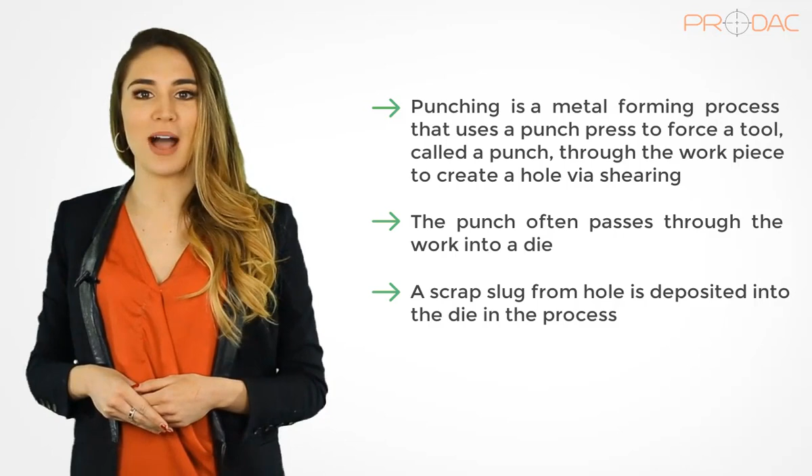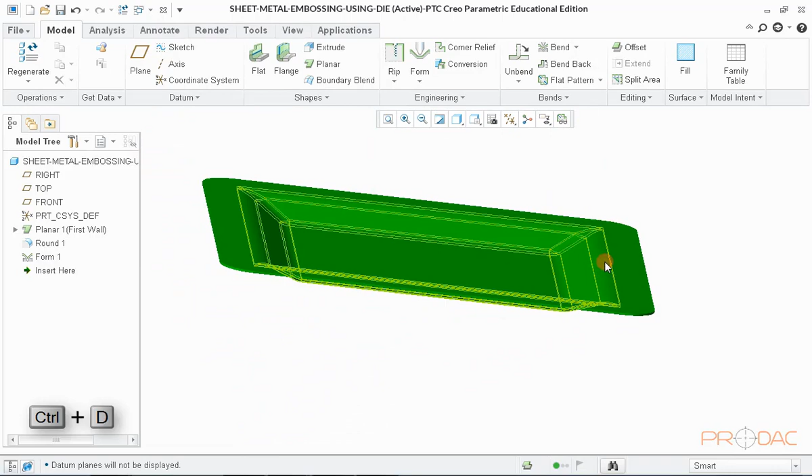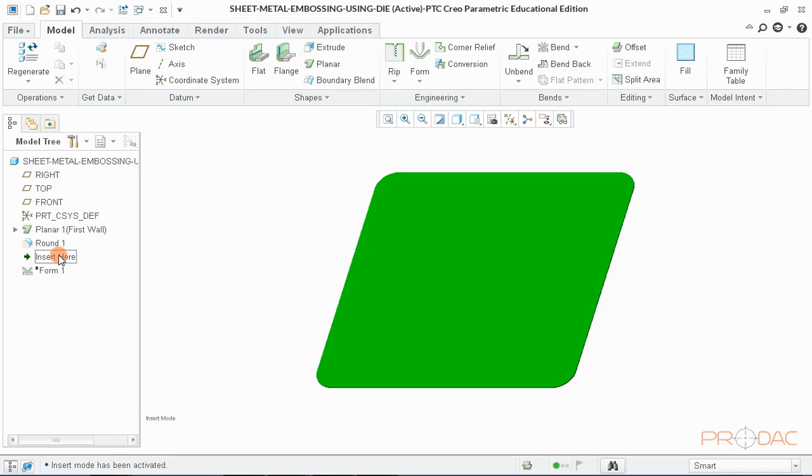Press Ctrl+D to fit the model in the screen. Change the orientation of the model to front view. It enables us to see the formed feature from the front side. Now pull the green arrow in the model tree above the Form 1 feature. So, now we get a flat sheet where we need to create this form feature using die.

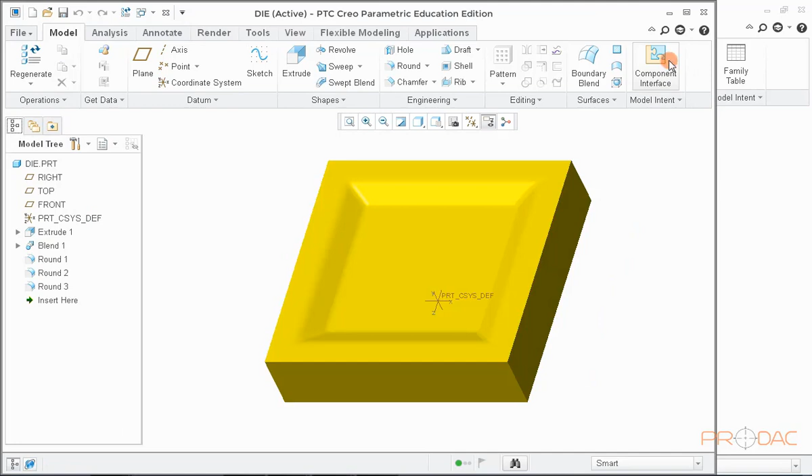Now, select the Form 1 feature in the model tree and right-click on it. After that, select the Open Base Model from the pop-up menu. Another model opens up. This is the base model used to create the final product. This is called die, and it has the similar embossed feature in it. During the product creation, this feature gets embossed into workpiece.

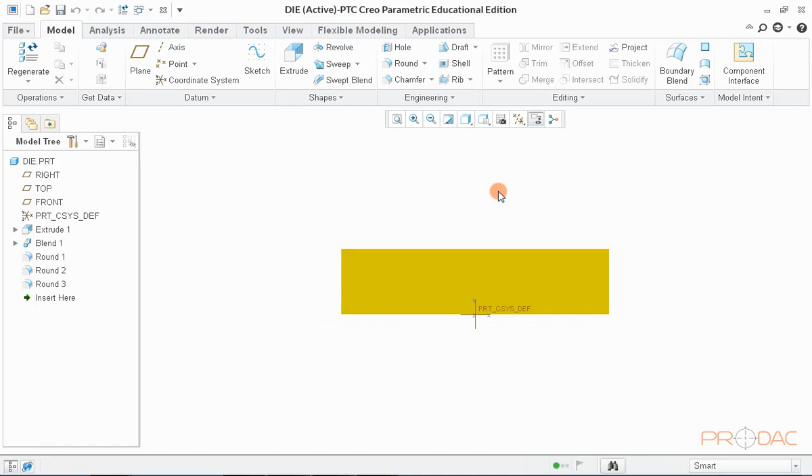Now, if we look at the front view of this part with hidden line visible, we can see the embossed profile very clearly. This is the exactly same profile which has to be embossed in our workpiece. Now, close this and switch back to working model.

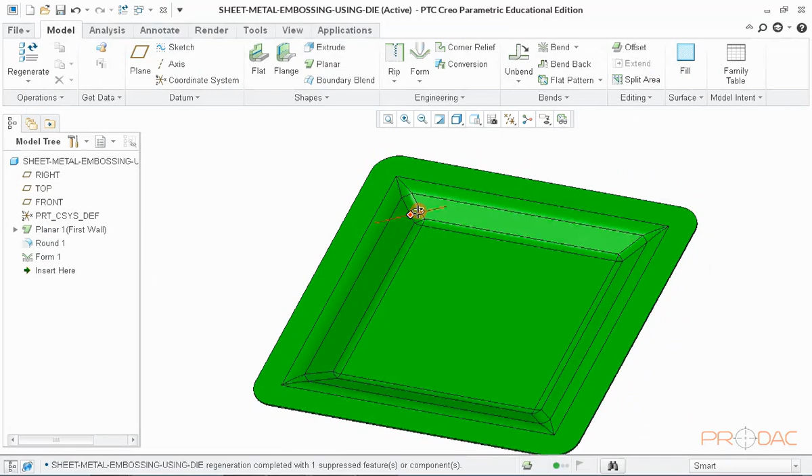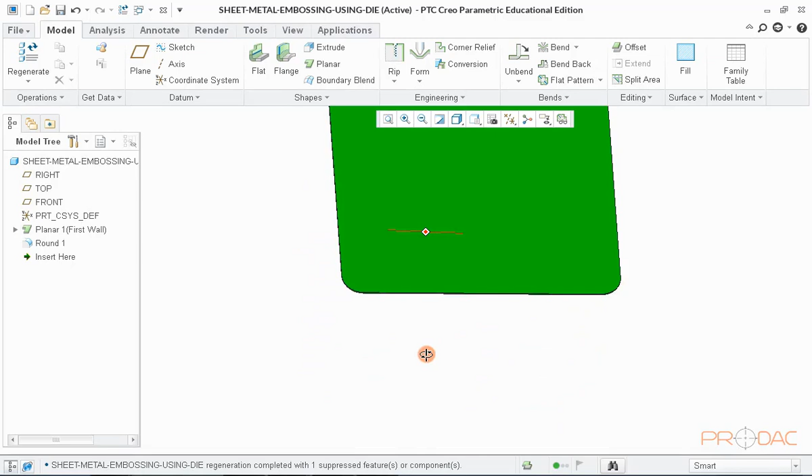Now, select the Form 1 feature in the model tree and then right-click on it. Choose the option Delete from the pop-up menu to delete this feature. Now we have a flat sheet which we used to create the final model. Next, click on the button labeled as Form in the top menu bar and use the option Die Form from drop-down menu.

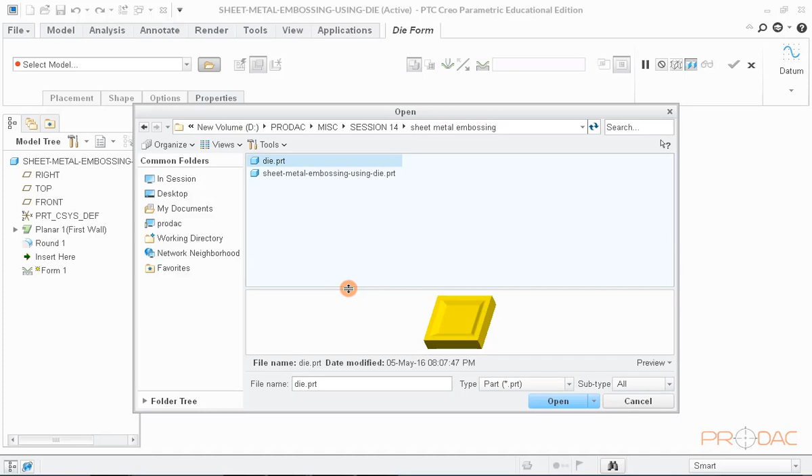Now open the desired die using the File Open button. A pop-up window opens up where we can see preview of the punch or die before we open it up. Once we open up the die, we have flat sheet and die available in the same window. Now, switch on the datum planes.

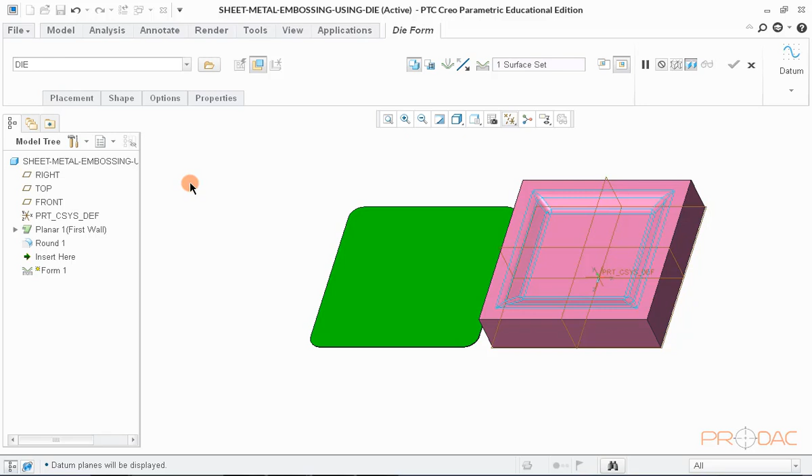Even after switching on the planes, we do not see any planes visible in the green part, which means that the layer containing planes is hidden. So, we have to unhide that layer. To do this, open up the layer tree and unhide the layer from there. Now, we have the planes visible in both the parts.

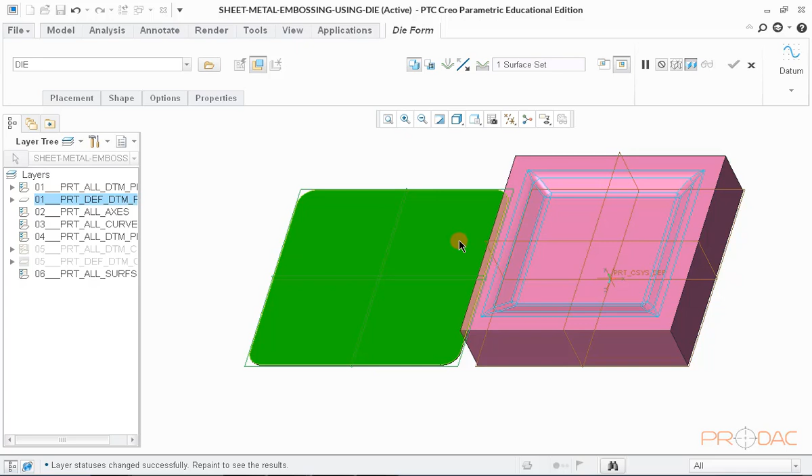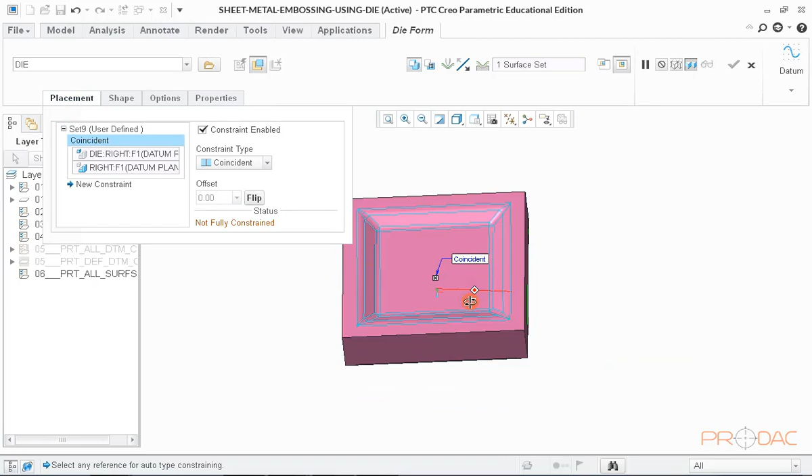Next, we have to assemble die and sheet metal part together in such a manner that embossed feature in die coincides with the desired position of emboss in flat sheet. First assembly constraint would be plane to plane mating. Second constraint would be surface to surface mating. And third constraint would again be plane to plane mating.

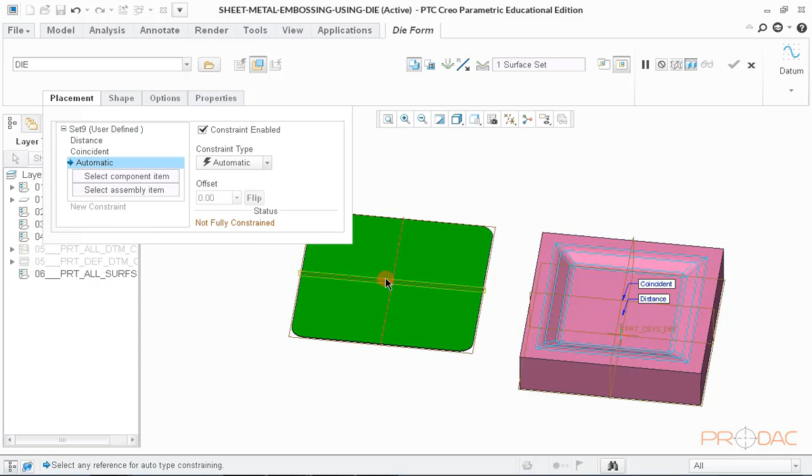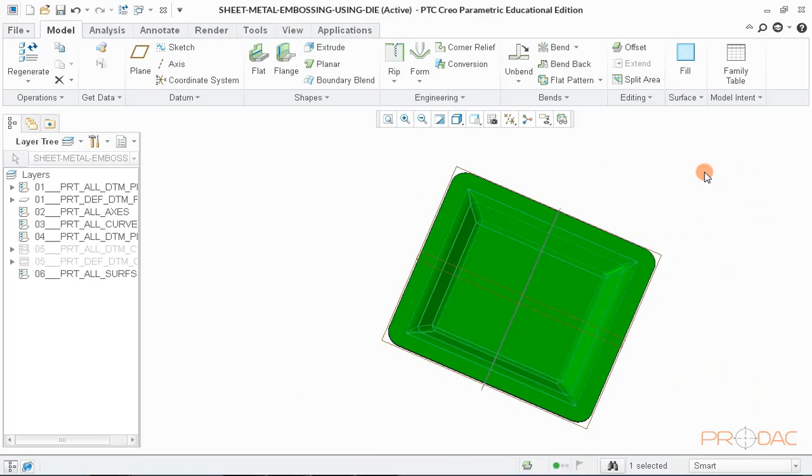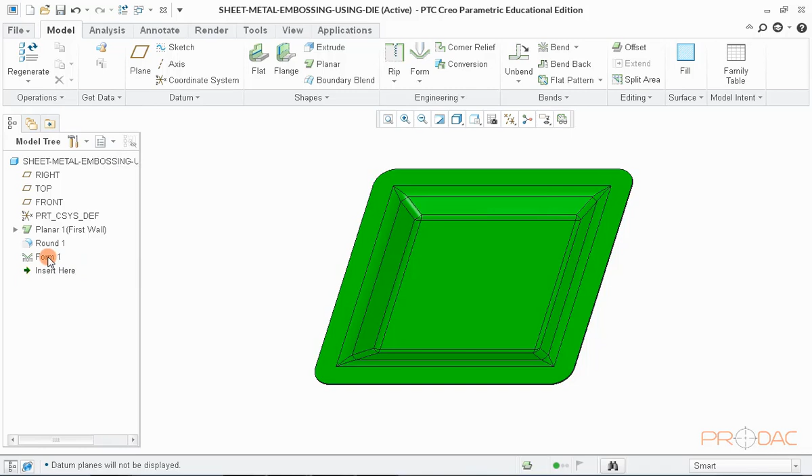Once done, click on Preview button to see the result. Result looks satisfactory. So now we can click on OK button to finish it. Hide the planes for better visibility. Press Ctrl+D to fit the model into window. With this, we have finished the learning of embossing operation using die. Next, we'll learn embossing operation using punch option.

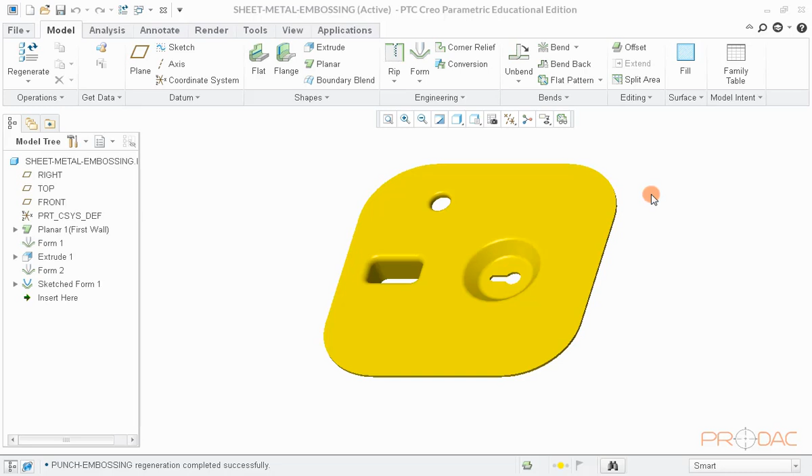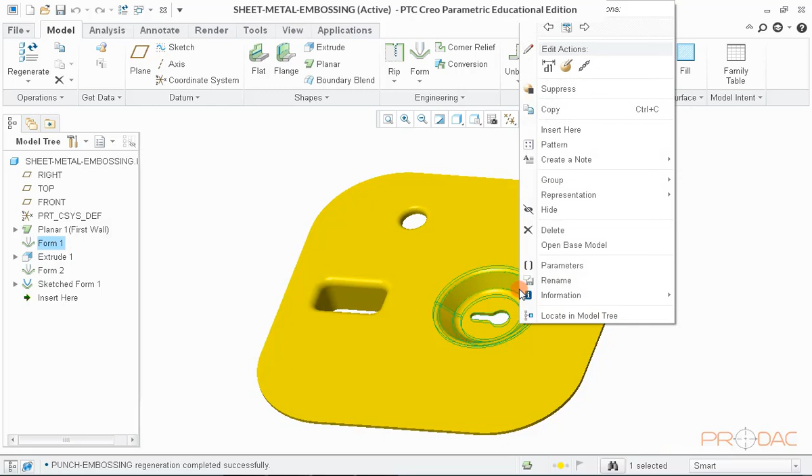This is the sheet metal model we'll be creating using punch operation. These are the punched features. As you can observe, radius is also created at the edges. To see the base model or punch for this feature, select the feature and right-click. Now choose the option Open Base Model from the menu. The punch model opens up.

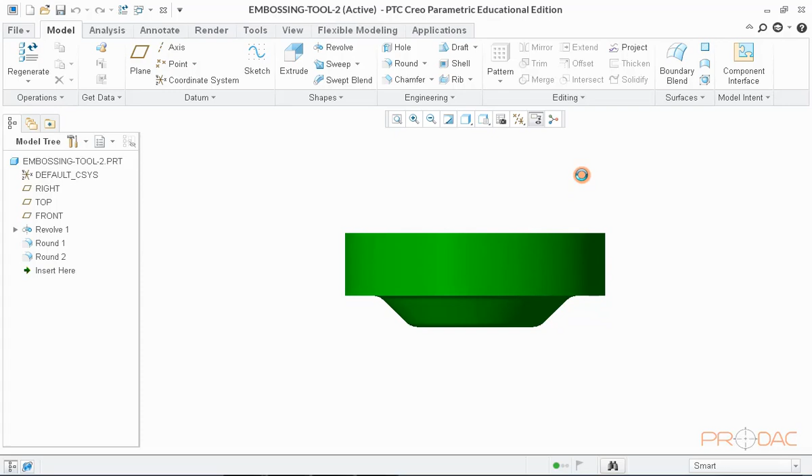Punch has all the features which need to be created in sheet metal. Press Ctrl+D to fit the model into the screen. Change the orientation of the punch to the front view. Now close the window and switch back to modeling window. Now open the base model of this feature.

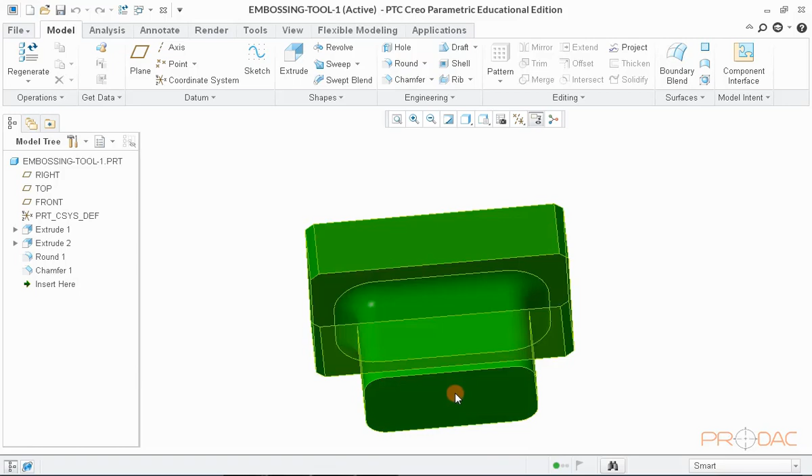Since this punch will create a cut hole in the sheet metal, the edges of the punch do not have radius. They have sharp corners to facilitate cutting. This is the bend edge, so we need radius here. Sharp edges are not allowed at bending locations. So, this is the geometry of the punch based on which the feature would be created in the sheet metal.

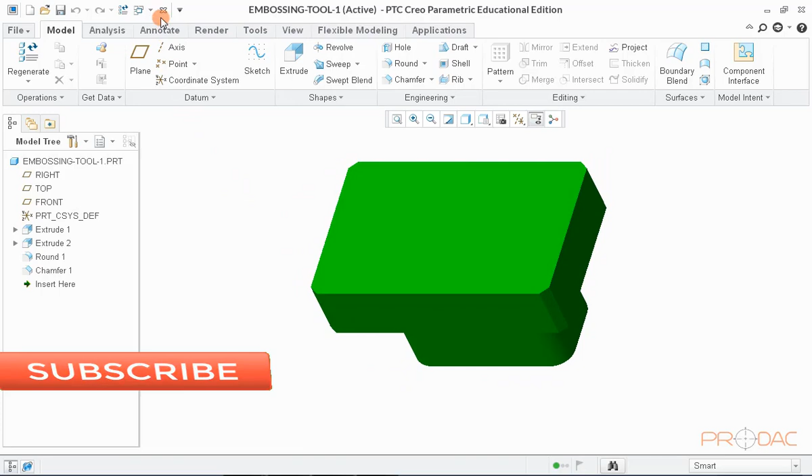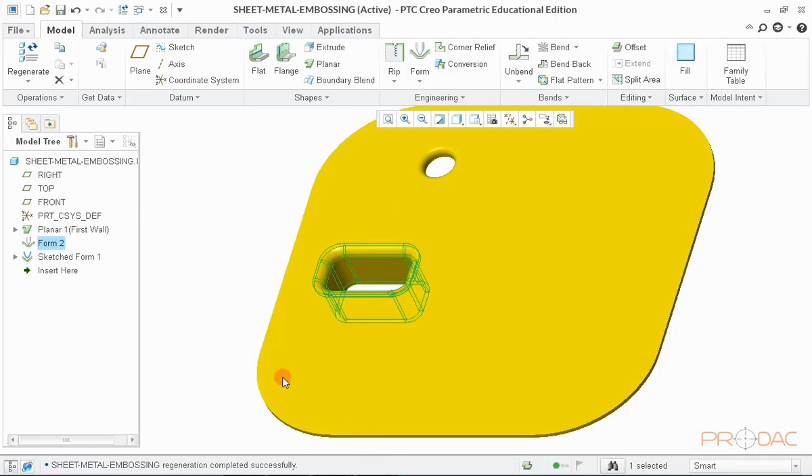Now, close this window and switch back to the modeling window. Now delete all the formed features one by one. This can be done by selecting the features and then right-clicking and choosing the option Delete from the pop-up menu. Now we have a flat sheet where all the features will be created.

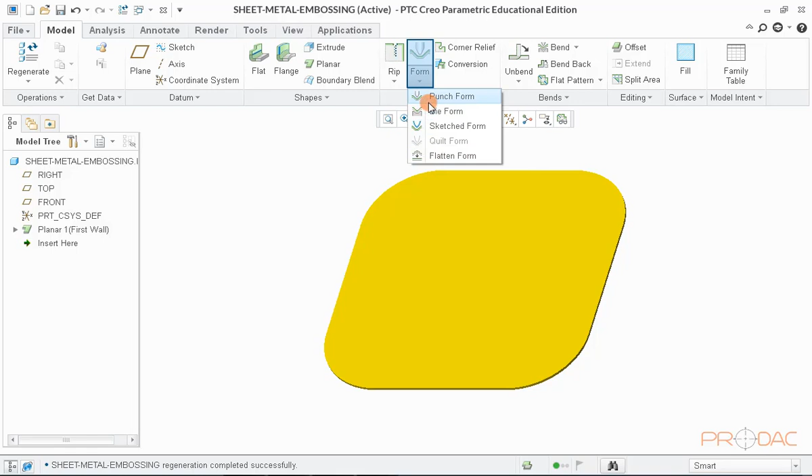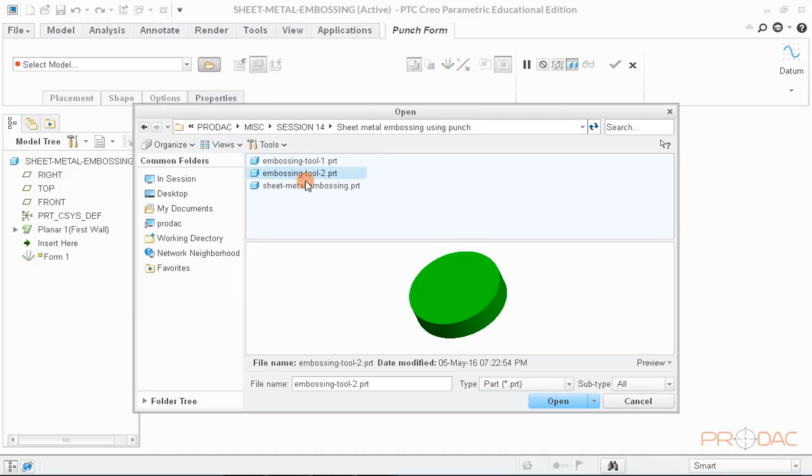Now, click the button labeled as Form in the top menu bar. Now choose the option Punch Form from the drop-down menu. Now we have to browse to the punch model. So, click on the file browsing icon next to the model selection field. A pop-up window opens up. Select the required punch file to open, and then click on the Open button at the bottom of the pop-up window. Now, we have both the punch and flat sheet in the same window.

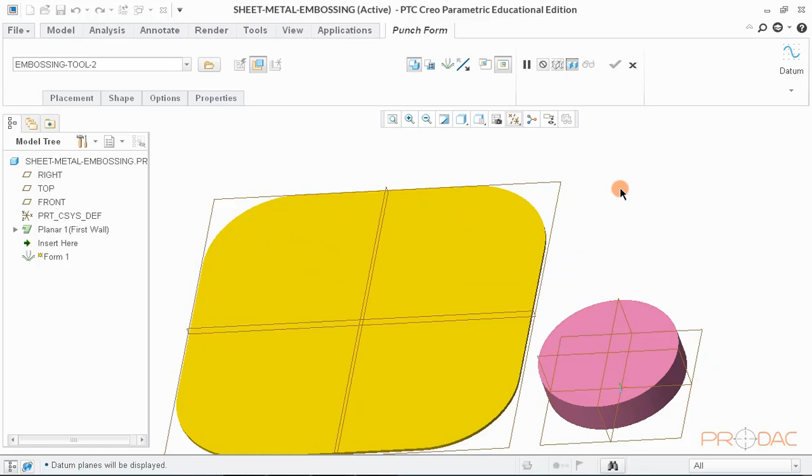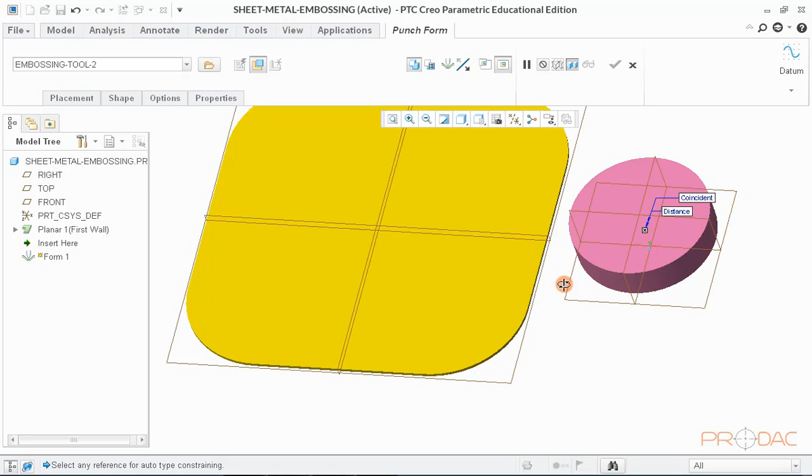To create a punched feature in the plain sheet, the punch has to be placed on top of the sheet metal at the desired position of feature creation. So, let's constrain both the parts by assigning mating conditions. Mating constraints must be given based on the position of the embossed feature. Constraints can be plane mating, plane offset, and surface mating. This mate is tool plane to surface offset. Next is surface to surface mating.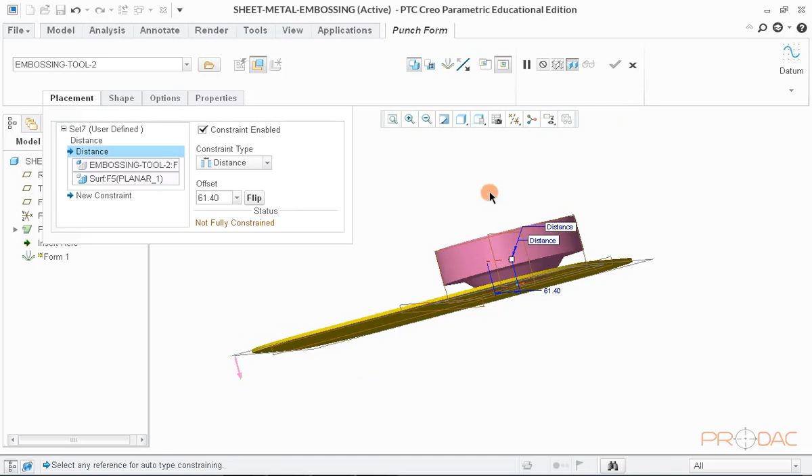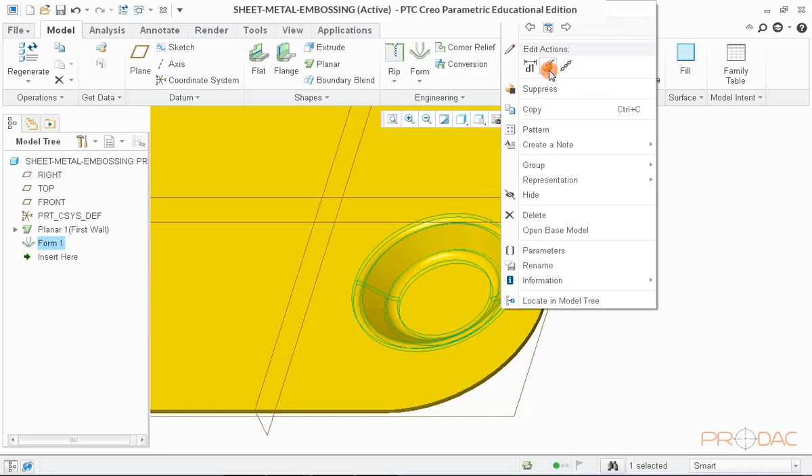Once the punch is fully constrained, click on the preview button to see the shape of the embossed feature. Now, click on the OK button to finish it. Press Ctrl plus D to fit the model into the screen. To fine-tune the position of the embossed feature, go to Edit mode by the right-click menu and edit the position of the punch.

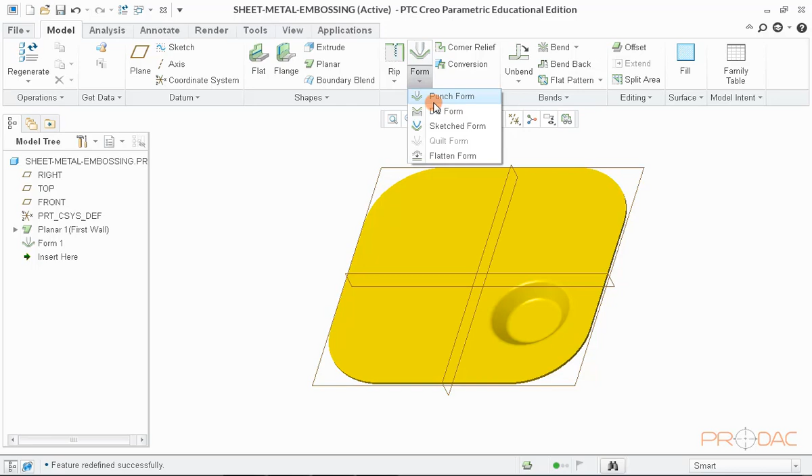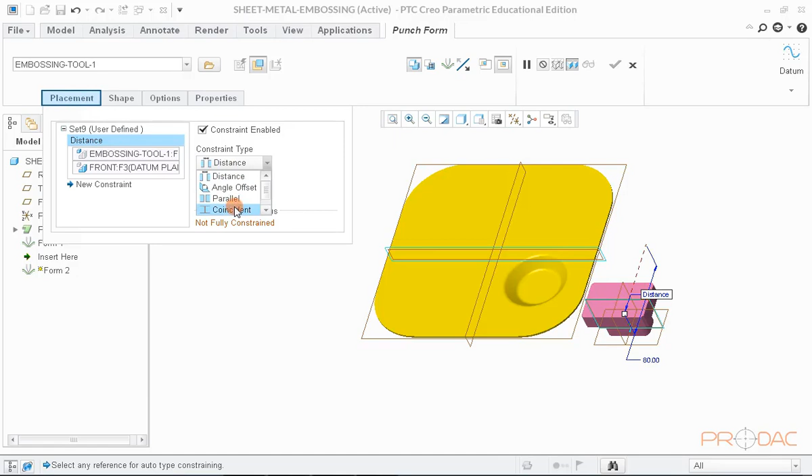Now, we'll create the second punch shape. To do that, click on the Form button once again and choose the option Punch Form from the drop-down menu. Now, click on the File Browse button, select the desired embossing tool and open it. Next step is to position this punching tool at the place where punching has to be done. Assembly conditions would be plane to plane mating, plane to plane offset and surface to plane mating.

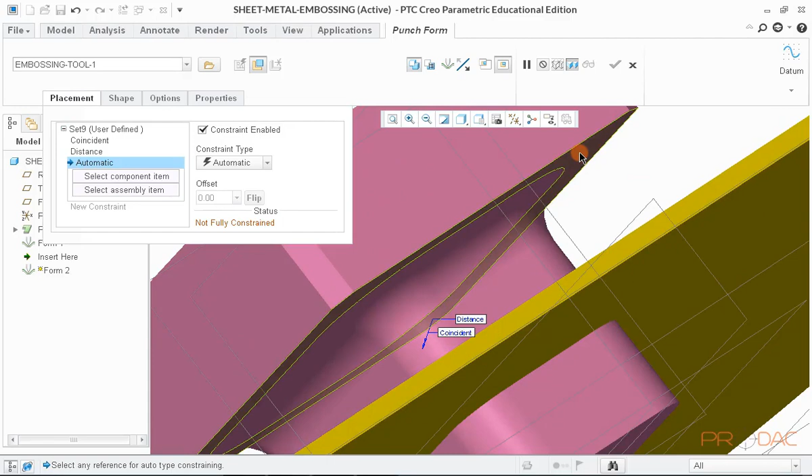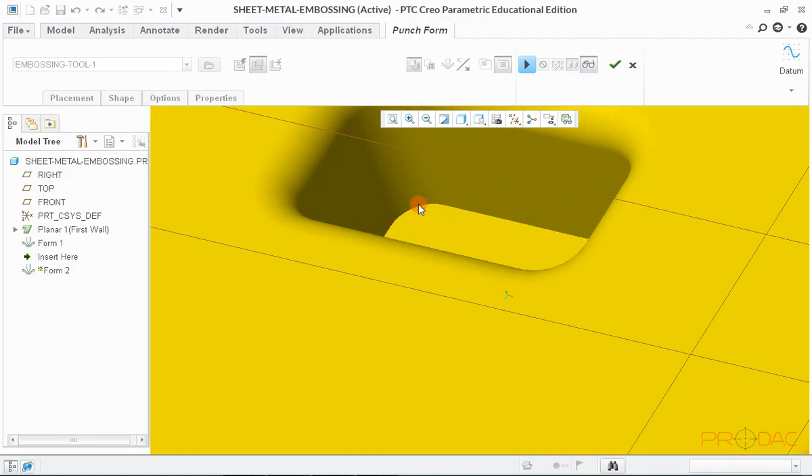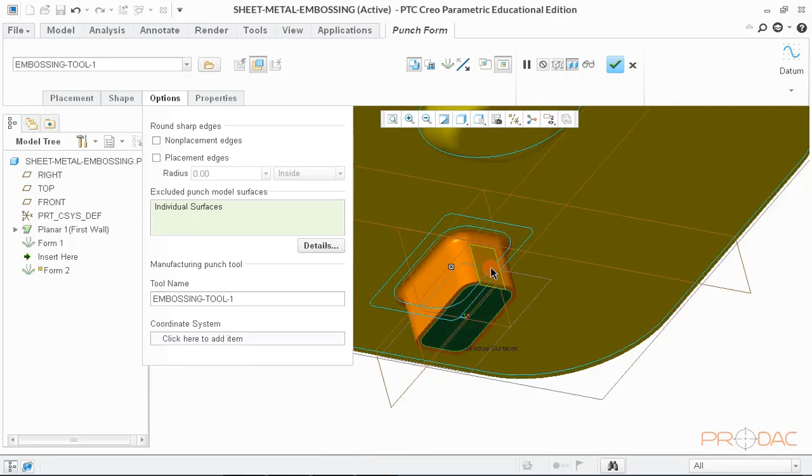Once mates are defined, click on the Preview button. We can see that the bottom is closed. As per requirements, it has to be open. This has to be corrected. So click on the Options tab now. Here, we need to exclude the punch surfaces which have to create a cut, or in other words, the surfaces which are not part of the punched feature. So, once we do that, we get a cut face at the bottom.

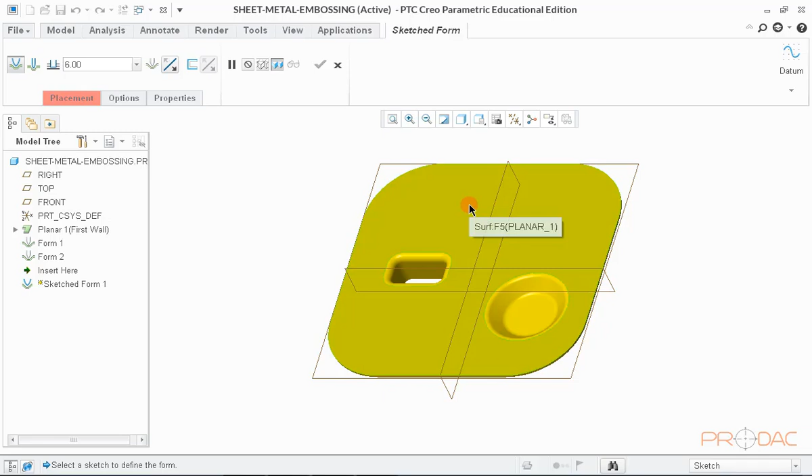So far, we created form features using die and punch. Next, we'll use a sketch to create a form feature. So, now click on the button labeled as Form in the top menu bar and select the option Sketched Form from the drop-down menu. Select the top surface to sketch the profile. Now create the sketch using a circle and position it at the desired place. Use the center datum planes to position the sketch.

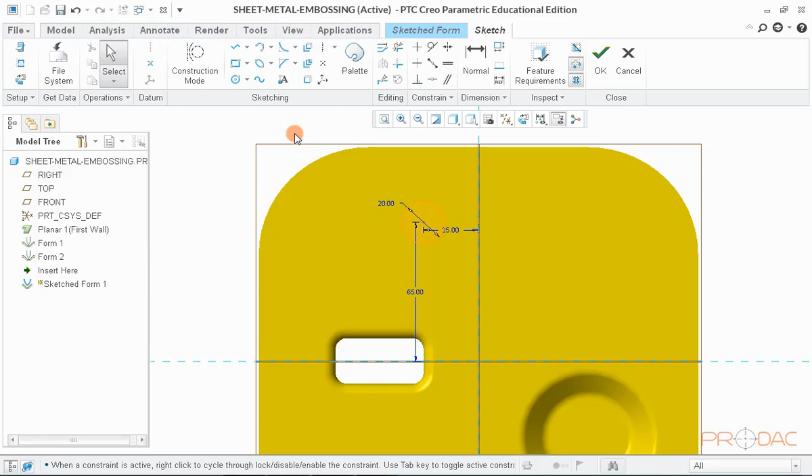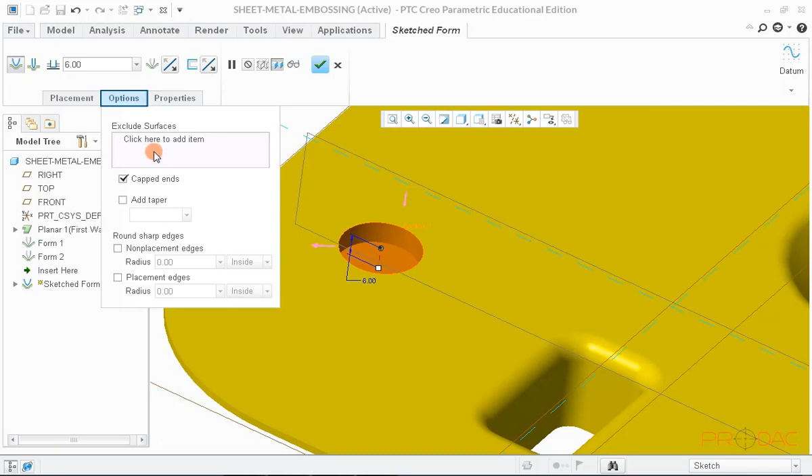Now, click on the OK button to exit from sketching mode. Flip the direction to the other side. Now, we need to exclude the surface which is supposed to be removed. To do that, go to the Options tab and select the top surface which has to be excluded. Now add the rounds at the edges by checking these options.

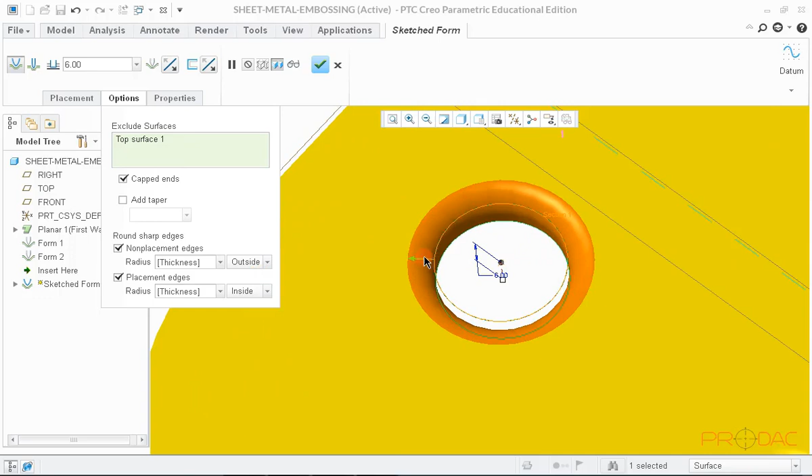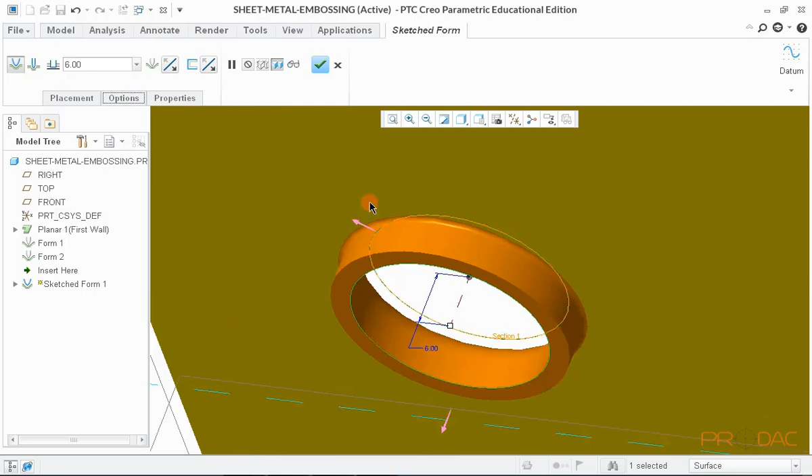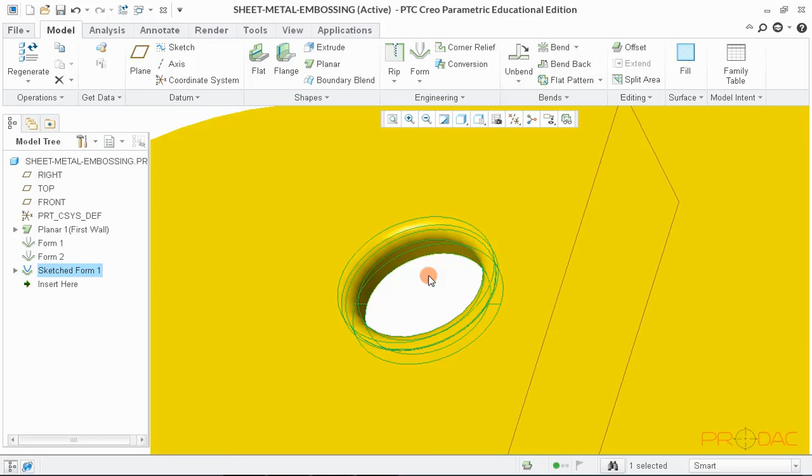Radius values can be changed from their respective fields. A custom value of radius can also be given. We have an option to change the length of this projection. Length can be defined by the value entered in this field. Now press Ctrl plus D to fit the model into the screen. To finish the modeling, click on the OK button. With this, we completed the session on sheet metal modeling in Creo Parametric.